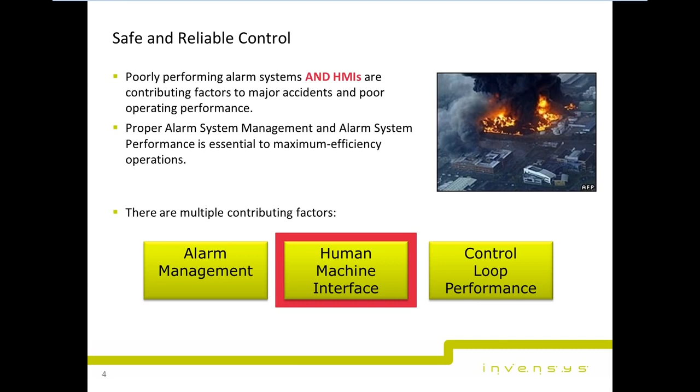For customers who are interested in following this type of HMI design, the 2014 release will provide you with several tools. One of the major tools is the Situational Awareness Library. Here's a look at some of the dashboard symbols that are available in our Situational Awareness Library. They're pretty boring looking. They're mostly just grayscale, monochrome. There's actually a couple different colors you can use as your base color based on element styles in the 2014 release.

But the idea is that when everything's gray and boring, things are running okay, because you want your operator to be able to stand far back from your screen, across the room even, because he may not be dedicated to sitting at your HMI screen 24 hours. In fact, there may be some screens out there that are totally unmanned for most of the time. We need to allow the operator to, at a glance, know whether things are in good condition or whether he needs to take action. So to do that, we use a minimalistic approach of only showing you things that give you information, as well as using color very strategically.

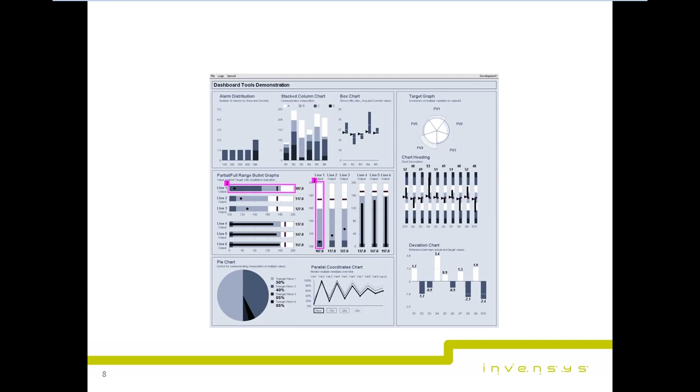In this screen, you'll notice some color appeared, indicating there's a couple of places that have alarms and need my attention. I can see that color change from across the room. To use one of the new Situational Awareness Library graphics, it's very similar to using ArchestrA Symbol Library graphics, which are also still available in the 2014 release.

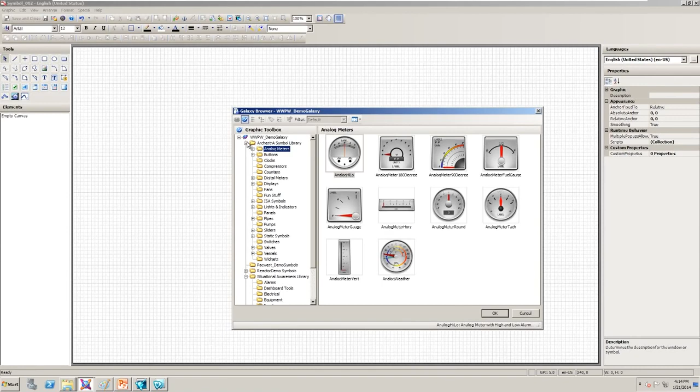We simply go to the button Embed Graphic, and now in addition to your ArchestrA Symbol Library, which you may be familiar with from earlier releases, you now have a Situational Awareness Library. There's a number of different elements, from equipment, there's dashboard tools, there's meters. The idea behind this is to give you a selection of graphics that all follow the same standard, that are already industry tested, and they'll work very easily out of the box, especially if you're using objects in System Platform.

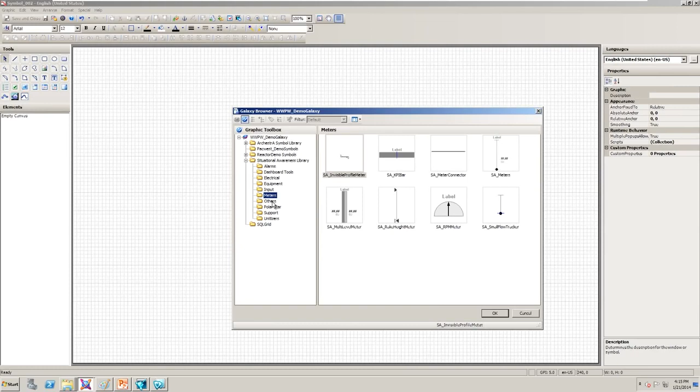When you pick an object, just as before with ArchestrA symbols, you just select it, hit OK, and embed it into your canvas. You can resize it. You'll notice the quality status symbol is still there. There are some new ways to interact with this symbol called symbol wizards. Check out another one of our videos to learn about that.

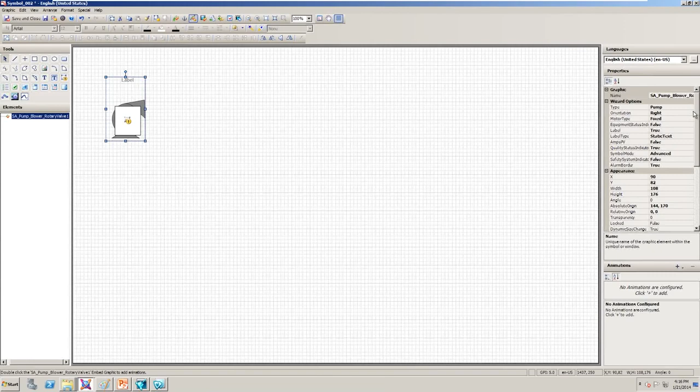Along with the symbol library in 2014, there are also a new selection of graphic tools and animations available. Situational Awareness Library graphics also take advantage of some of the new features, and you'll notice that as you customize them, the custom properties will be auto-filled to work with minimal setup, especially when you're using System Platform objects. Let's look at one of these elements in action.

Here's a temperature at 60 degrees. With the left ArchestrA symbol, we can see that it's between 50 and 75 degrees, and based on the label, we can see it's probably a temperature. On the right, we get a little more information from our situational awareness graphic. Even without the label showing that it's a temperature indicator, we could see that it's temperature from the shape of the meter. It has that temperature thermometer bulb shape.

As you customize your meters in this library, you'll notice that there's different shapes for pressure, flow, temperature, etc. You even have the option to turn off the label as well as the engineering units and the number. A number, again, is data. It's not really useful information.

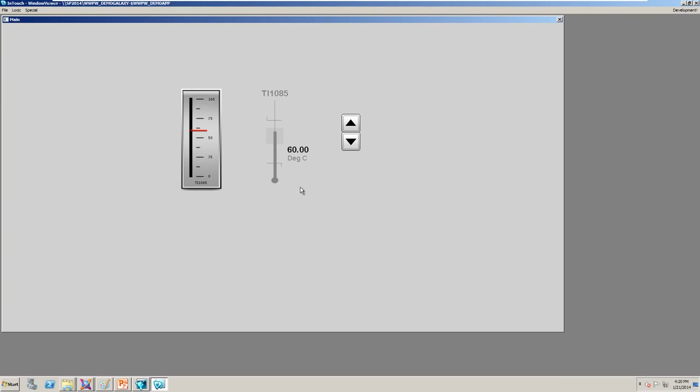Knowing that something's 60 degrees, especially as an inexperienced operator, doesn't let me know whether I need to do anything about it. However, if I know that 60 degrees is inside or outside of my optimal range or approaching one of my alarm limits, 60 degrees doesn't matter as much as knowing those other pieces of information. In our situational awareness meter, we've got a gray shaded range showing me my optimal range, in addition to 2 ticks showing me a high and low alarm limit. There's also a number of other things you can use these for. But at a glance, that's how these symbols convey more information and less overload of data.

One concept that's championed in high-performance HMI is the use of level displays, so that instead of every display representing a new P&ID drawing, that's generally too detailed for an operator to get much information at a high level, we start building level displays so that at the top level, level 1, you've got an overview of possibly an entire area or an entire plant, so the operator can look over and see, is my entire area in good shape or not. We use color again strategically to identify when something is not okay. That directs the operator to drill down to more detailed levels.

One reason this is important is if you're interested in exploring high-performance HMI or situational awareness, you don't have to do it all at once. You could choose to implement a few parts at a time, one of which might be adding an overview display. You can also use new features like alarm borders and other animations that you can see in some of our other videos to help bring the operator's attention where it's needed, when it's needed.

So that's an overview of the Situational Awareness Library. Go check it out in the 2014 release of Wonderware System Platform.